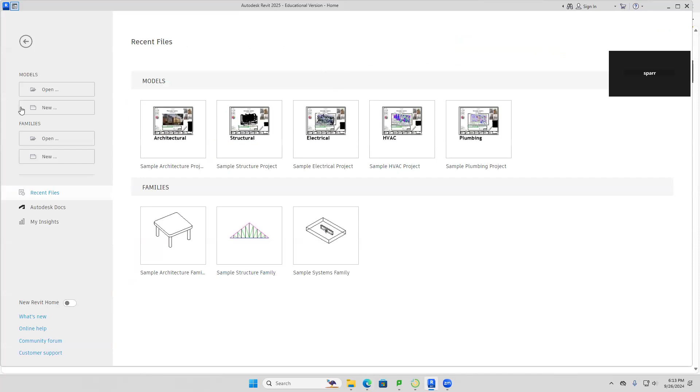Okay, so we're going to start by going to Revit, and Revit's out here, and now we're going to go over to Open. We're going to start by opening, going to our downloads, those should probably be on your desktop, go to downloads. And then here you're going to see modern hotel levels right here. So go ahead and find modern hotel levels and open it up, and it's going to have to upgrade because that's an older version, but that's okay. Let's go ahead and open that up.

Okay, now this says open manage links to correct problem. Don't need to do that, just go ahead and ignore it. That's fine. And this is what this looks like.

Okay, so what we're looking at right now is, we talked before about working with the CAD plan. So the CAD plan that we have going on here, hi Silvana, and what we're doing right now is, yeah, well just get signed in and I'll walk you through the assignments. Okay, so what we have right here is a CAD plan. We talked before about having a CAD plan and tracing over it. That's what we have right here.

Now let me show you something else that's interesting. What we're going to do right now is take a look at a plan view. A plan view is a floor plan, meaning you're looking down, and as you look down on this, this is how it will be built if you actually slice the building and look down on it. That's what a floor plan is. But there's other types of views.

So we're going to go ahead and take a look at the elevations. Over here there are some elevations. We're going to go here and choose south, the south elevation. When you do that, it's going to open up and look like this. You're going to see 2 horizontal lines, level 1 and level 2. You guys see that?

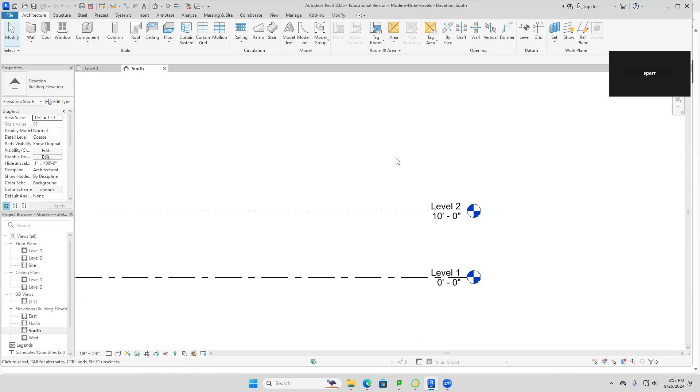I was going through last night on your... Well, good luck with that, because I've been really playing jazz with this class. I've been all over the place. I've been really improvising a bit because inspiration hits me.

Okay, well what you want to do is go to Brightspace out here, okay? When you go to Brightspace, Silvana, you want to go here. Now are you on Brightspace right now? Yeah, it's right there. Okay, then go here to Revit intro assignments, okay? Now what we're gonna do is you see you've got this modern hotel levels right here, we're gonna download that. You're gonna do the same thing, download floors and ceilings and footprint. But for right now just do levels, okay?

Okay, now when you've got that, it's gonna show up here on the right, double click on it to open it up, and Revit will open too, okay? So you don't want us to open it the other way, like how you normally open it? Nope, you can just double click on this one because it's not a template, it's a project. And when you double click on it, it's gonna tell you it's upgrading, right? Let me know when it's up and running.

It's not gonna look like this yet, so I gotta tell you where to look here. So what you're gonna probably see is this right here. Does it look like this right now? So it said don't upgrade it? You want to upgrade it. You can't open it if you don't upgrade it.

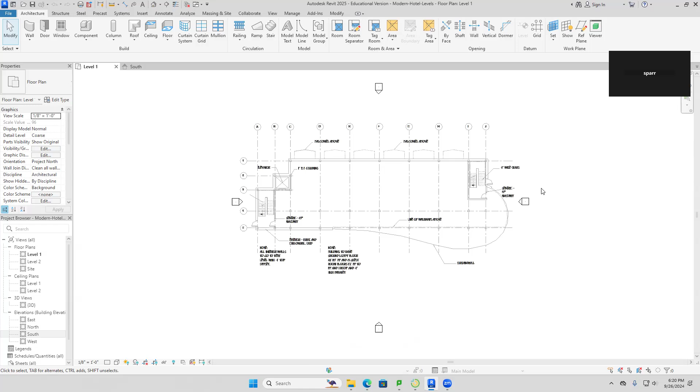Okay, now what we're gonna do here is we're just gonna add a couple levels above, and we're gonna add one underneath, just to see how this works. In the south elevation, whenever you put in elevations, you have to put in levels in an elevation. The reason why is because if you're looking down, there's no way to put in a graphical representation of a floor. You have to do it from elevation, looking at it from the side. So now I want to stack it up.

So we're gonna make them all 10 feet apart. Over here, see this right here? It says level. So click on level. When you click on level, you're gonna notice it's trying to make another level right here. But what we want to do is something a little bit different—we want them all consistently 10 feet apart. So we're going to go over here. See where it says offset? Type in 10. And hit your numbers lock, by the way—if your numbers lock is not pressed, you can't type it into the number pad, so make sure it's there. So type in 10 and press enter, and it becomes 10 feet.

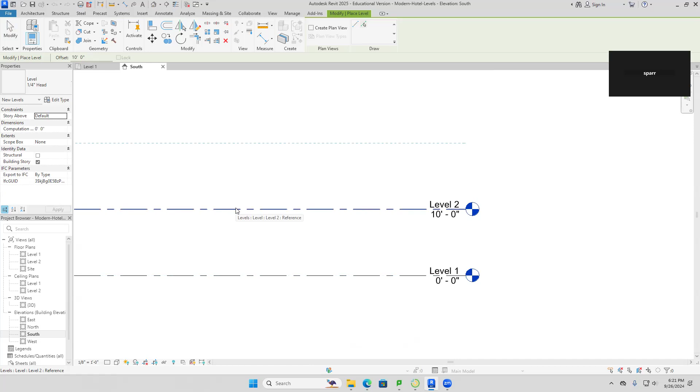Now, over here, there is another little tool here—this is pick lines. So choose pick lines, click on it. Now watch this, this is where the magic happens. You hover your cursor over this right here. Look at that—can you see a dashed blue line either above or underneath? You should see it above. If you don't, you just got to jiggle your mouse a little bit, highly technical language. But you want to see the dashed blue line above, and go ahead and click. And when you do that, you see level 3? That just created another level.

Now we're going to go over here and do another one. We're going to touch this right here, click here again. Click there, level 4. And let's go over here, we'll do one more, and we'll go here and do level 5, just like that. So we did 3 and 4 and 5, we went ahead and added those.

Now that is good. Now we can add a basement. Let's just pan down here and make one go down. So you go here, and now we want it to go down. Hover your cursor right here and click, and you're gonna get another level that goes down. Then press your escape key to finish it, press it twice to end it. And you should be seeing right here that down here, this is level 6, -10 feet.

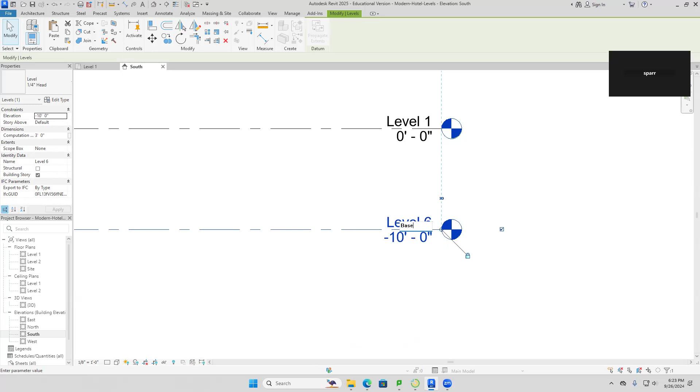Okay, we're going to rename this because level 6 is a terrible name for a level that's beneath the ground. So we're going to double click here, and change it from level 6 to basement, B-A-S-E-M-E-N-T, like that. And you should be okay, even though it's kind of dark in here—if I can do it, you should be able to do it. So there's your basement. Okay, now we have those all in place, and those are good.

And now what we're going to do is you're going to notice something here. Let me ask you a question. Take a look at this level 2 and this level 1 icon—what color are they? Blue. And what color is this?

Now what we want to do is, we created levels, but we don't have floor plans to go along with those levels. You may or may not need them. For instance, for a basement, if it's just a crawl space, you probably don't need a floor plan, but for a full basement, you do. So we're going to make a floor plan for the basement and the other levels going up.

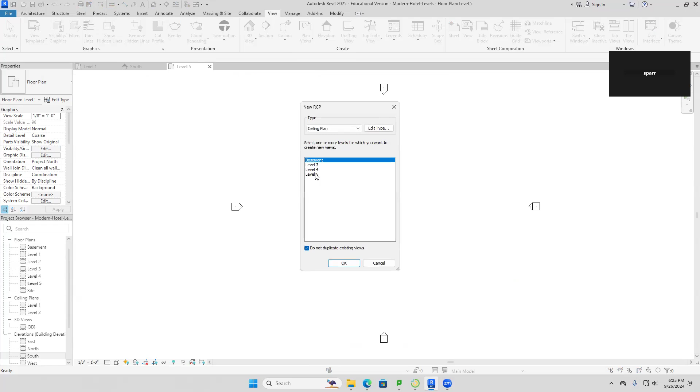We want to do the same thing with our ceiling plans. Okay, so we went ahead and did that. Now let's go back over to our Plan Views again, and now we're going to go to Reflected Ceiling Plan. Same thing, lather, rinse, and repeat - let's grab these two and click OK.

Now when you do that, we have just created floor plans and ceiling plans, and they all correspond to this right here. Now take a look at your South elevation again. What I'm doing right here, just so you're clear, is using this little red spotlight so I can make sure you're seeing where I'm going. These are our tabs - you can have several different things open at once. We went to the south elevation right here, we're looking at this, and now we're seeing this. Now look at this over here.

These are blue now. Why are they blue? Because they have a floor plan, at least one floor plan. If they have at least one floor plan, they turn from black to blue. Okay, that is how you make levels. Any questions about that at all? Okay, so that is how levels are constructed.

Now, that means at this point that as you're working with this, any levels that you would ever need to create can be created right here, and you would do it using the levels tool, which we just did. Now along with that, you can actually change these after the fact too. Let's say you need something different - let's say between level 1 and level 2, you actually have a big mezzanine area, so that has to be raised up a little bit. Well, we could do that, but we're not going to do it right now because it would get messy. If we raise this up and leave this one right there, we don't want to do that, so we're just going to leave it as it is right now. But you could do it.

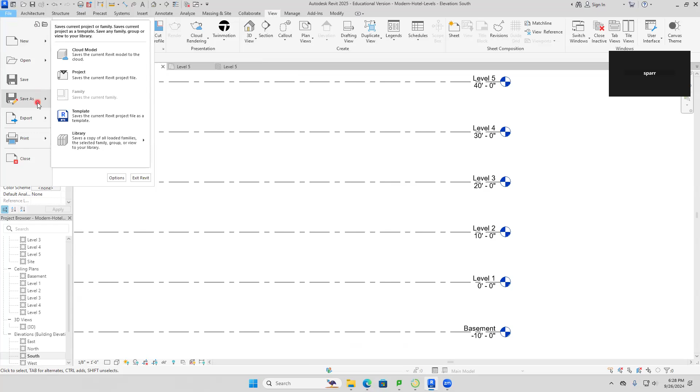What's not to like? So you're going to go here and click save. Is that letting me save it? Okay, just save it as that. So we're going to go to File, Save As, project, and we're going to name it. It's going to be capitals, and we're going to call it hotel levels with your last name. Okay, so you got that, go ahead and do that. Save it to your desktop or wherever you may want to do it, save it.

And then what you're going to do is you can go ahead and turn that in right now. So here you see hotel levels right here. What you're going to do is click on this assignment here, should be able to do that, and you're going to go ahead and upload it right now. So let's do that while we're thinking about it. Go ahead and do that, and upload it. Give me the thumbs up when you guys have that done.

All set, Michaela? Got that? Okay, easy. Okay, all right, Sarai, got that? All right, Silvana, doing okay?

All right, now what we're going to do, now that we've done that, we are going to continue on our Revit excursion here. We're going to close out of this one. So we're going to go to File, and we're going to go to Close.

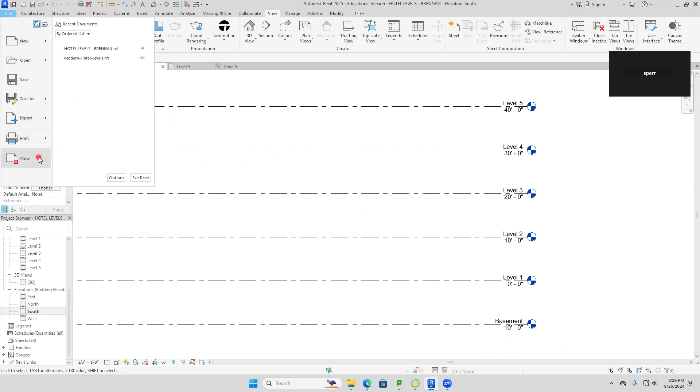And now what we're going to do, we're going to open the next one. Now the next one on the list was, let's see here, it was floors. We're going to go to floors. So go here and open up floors. And that's also going to have to upgrade. That's normal.

Sure, I'm sorry? Yeah, close, yeah. And I got an error here. Don't know why, but not going to worry about it. Okay, so we're going to continue on here.

All right, and just go ahead and dismiss the errors when they come up. Can you guys all see something that looks like this? Mm-hmm, you guys will see that. Okay, now what we're seeing right here, this is the first floor, and here's furniture and so forth, which we could put in. But for right now, what we're going to do is this.

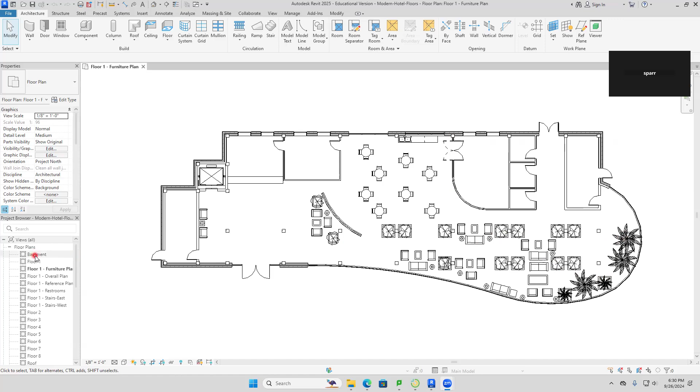We're going to go over here, and we're going to take a look at the basement. So go down here to the basement. Basement looks like this. Now, what we have going on here, this is actually the ground floor. This is the basement that we have right here.

What we're going to do right now is we're going to hide some of this information around the perimeter because it's kind of obnoxious. So what we're going to do here is a couple things. Go ahead, this is an elevation marker, click on that elevation marker and then just type in VH and that'll hide it. Then click on one of these section markers, click right in the center, type in VH, and VH stands for visibility hide. And we'll do the same thing for the grids. VH hides it. And when you're done with that, you now have something that looks very clean.

Okay, so now at this point, this is a very clean floor plan.

Now, there is no floor in here yet. Let me show you something you want to do though. Go down here and take a look at this right here.

Do you see this? This looks like it says select elements by face. Can you guys see that at the very bottom? It's got a blue, it's a blue sheet of paper with an arrow with an X. Do you guys see that? It's called select elements by face. Well, you want to click on that so you can select the elements by face.

You want that. Okay, now, there is no floor here. I'm going to prove it to you. What I'm going to do is let's prove it to ourselves. Let's go ahead here and we are going to take a look at this.

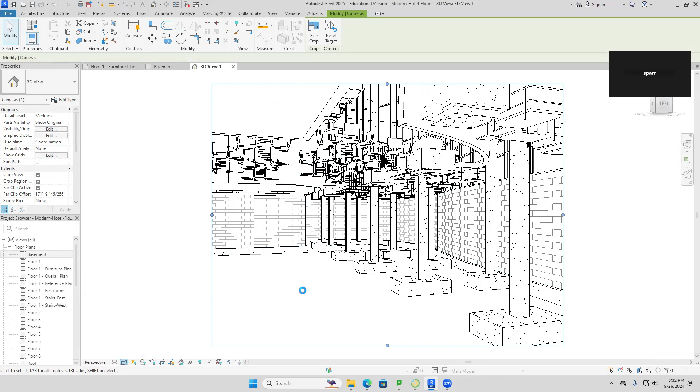You're basically not seeing a ceiling either. But down here, there is no floor. If I go ahead and make this realistic, there is no floor. That's basically just, these are sitting pretty much in the middle of nowhere. All right, so there's no floor.

So we want to put a floor in here. The floor is going to be going in above all these footings and so forth. So we're going to do that.

Okay, how you guys doing? Good. All right. Okay, Audrey, doing okay there? Yep. All right. So, okay, so back over to here. We don't have a floor just yet. Okay, all set there, guys? You need to have something? Almost. All right. There. Okay.

All right, so now to put in a floor. Now, fortunately, floors are really easy to make. Okay, we've already done a floor before. Now this one's a little more complicated because what we used before was we actually used just a rectangle command, which works if you have a rectangle. This is not a rectangle.

So what do? We give up and call somebody else. No, or you give Professor Tom a call. How about you take a call? I actually do that. I actually have all these students I teach. I've taught thousands of people the last few years. And so what I'll do is I say, look, I give my email, and I'll get these calls. I'll get these emails later. And he's like, hey, they'll ask questions and stuff.

It's pretty fun. All right, now what we want to do here is, here's what we want to do. We want to make the floor go inside here. Okay, the floor, notice, watch what I'm going to do right here. The devil is in the details, as they say. What you want to do is you don't want to go to the outside. You want to go to the inside, right?

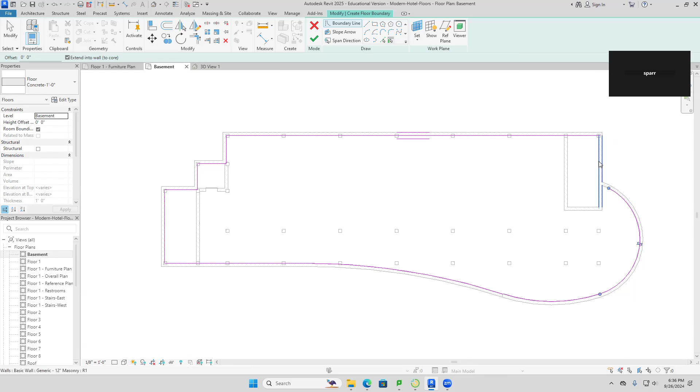Now, this is already done for me. All I got to do is click on it. I go ahead and do that. And then I want to grab this one right here as well. So I've got all that. Then I'm going to go right here and I'm going to click right here.

Now, once I've done that, that is actually complete, except there's a little bit of a problem here. The problem is this little tail that's sticking out. There's a little tail here. This is a problem. Here's the little tail, see this right here? All right, that cannot be allowed to stay. So what we're going to do here, we're going to use this tool right here.

This is called Trim Extend to Corner. Now, please look at this. When you hover your cursor over it, it's going to say Trim Extend to Corner. And what you're gonna wanna do with it is this: we're gonna go up here and use this, click on it. Now watch how I use this.

You're gonna go over here and you keep what you want. You basically click on what you want to keep. So you click here and then you click here. And when you do that, the tail disappears. Can you guys see that?

Yeah. Now, once you've done that, any boundary that you ever make in Revit, you always have two choices. And the choices would be these: accept it or abort mission, okay? Do you want to discard the changes or do you want to accept it? In this case right now, we're going to hit the green check mark and see how we did.

So hit the green check mark, and when you hit the green check mark, it's going to say this, if you did it right. It says, would you like to join geometry and cut the overlapping volume out of the walls? Hit yes, and it should turn blue like this. That work? If that didn't work, let me know.

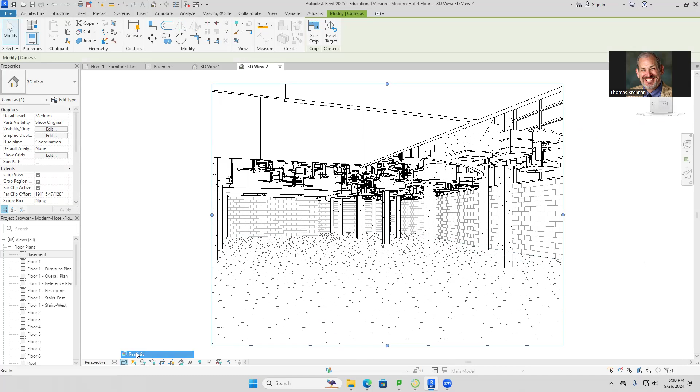We're going to go here, and we're going to go to camera. So go to camera, and you're going to put the camera right here, and we're going to look all the way down in this direction here. So just pull your view target down to the end of the building, and now, hey, Shazam, look at that. You now have a floor. So there is a floor. All right, that makes sense?

That work okay, Silvana? It's just this piece right here is gone. What was that now? This piece right here, I'm trying to figure out how to get it back. Okay.

So I clicked here, like you said, this one, then I clicked here. Yeah, that's the wrong one. You did the wrong one. So you want to choose this corner, click on this end here, and this end. Oh, there you go.

And then hit the green check mark, hit yes, and then zoom out. What you want to do is click on the arrow to the right of the house, choose camera, and set a camera right there, and look, your target's down here. Click right there. Then go down to visual style, and you get this stuff.

Yeah. How's it going here, guys? Here's the floor, that's fine. What's that? I was just saying that. Yeah, I know, I know. Well, the reason is there's no floors yet, so we're helping to make things work out better.

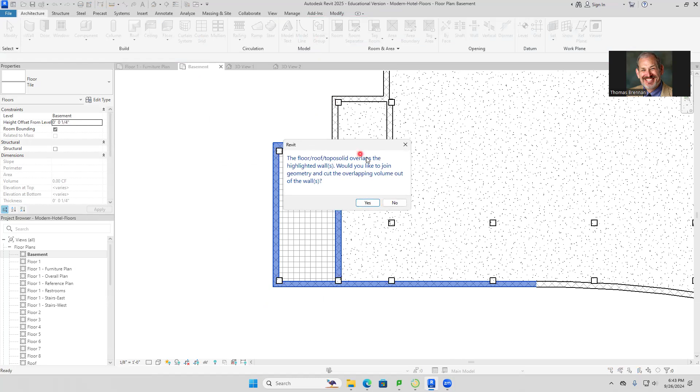To fix it, we go here and use this—this is our Trim/Extend to Corner. The Trim/Extend to Corner lets me pick what I want to keep, and it closes it just like that. Now once you've done that, hit the green check mark, and it's going to say the floor topo solid overlaps. Go ahead and say yes again. Now look at that—you now have a tile floor.

The tile floor is sitting on top of the one-foot concrete floor. You guys got that? Does that make sense? Mike, that work okay? Yeah. Ben, that work okay? Yep. All right, Audrey, okay? All right, now let's take a look at this—let's go over here and take a look from another camera.

So go to camera and we're going to click right here, and look out through the end here. Now look at that. You've got a tiled stairwell right here. I'm just going to open this up a little bit, and that's what you're looking at right now. It's rough, but it's got that right there.

So we have this going on here, and then if you make it realistic, you'll get a very good idea as far as like what that looks like. With realistic, looks like my tile went away, but that's okay. Let me try texture, see if that looks a little better.

Yeah, texture isn't any better. So what I'll do is make consistent colors, and you'll see your tile there. Okay, so that is how you could put a floor on top of a floor, and it works just fine. You guys all see that?

Okay, now we're going to repeat that. Let's go back to the basement floor plan, and now we're going to repeat it over here on this side. Lather, rinse, and repeat. We're going to go over here, now over to this side, pan over to here, and do the exact same thing.

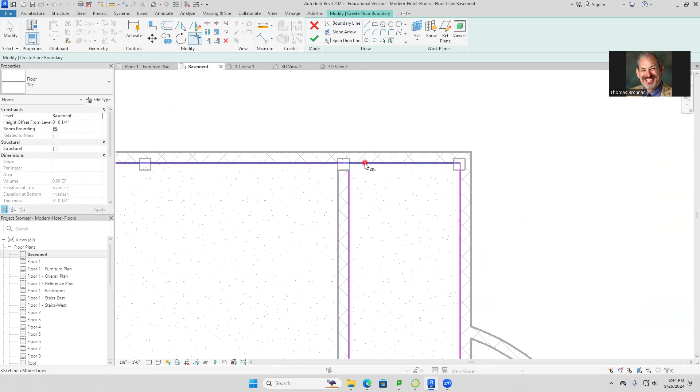The floor is already set up, so go to floor, we're going to do the exact same thing. Everything's the way it should be. We'll go ahead and do the same thing here, and then we'll have to use our Trim/Extend to Corner to fix the corners, or corner in this case. So go from here to here and hit the green check mark, and I'll say yes again. And now I have this here.

I now have the tile on top of the floor. So easily done, very easily accomplished. So now we have a tile floor on top of our concrete floor in our stairwells. Make sense? All right, easy peasy. Okay, so we got that now. Okay, now we're going to save this, and let me make sure I got this one right.

This one's going to be called, save this as hotel floors dash your last name. So go to file, save as.

So that's how that works. Just reviewing this stuff. Okay, so we can close out of there now. Go to file and go to close, and that will go ahead and close out of there. So we went ahead and did a couple of items right there. We did levels, we did floors. Now we're going to do ceilings.

Now ceilings are very similar to what we just did with floors. We're going to go to open again, go to modern hotel ceilings, and open that up. Okay, just click OK if it gives you an error, and click close. We'll close this one, we'll go ahead and ignore, and close out of this too. All these problems, but for our purposes, they're fine.

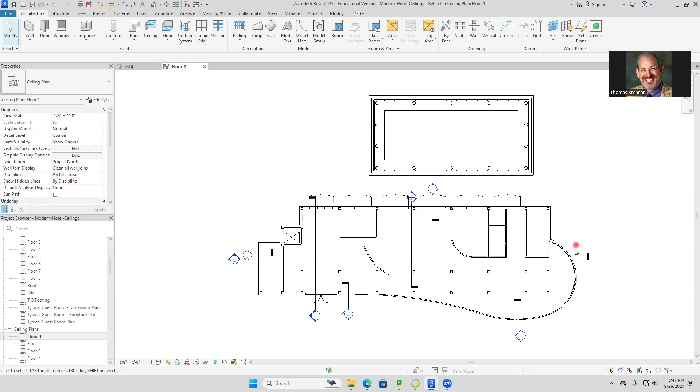Okay, now what we're going to do is hide the grid. So click on the grid, and type in VH, visibility height. And then you're going to click on these section markers. I'm going to hide those two. Okay, then we're going to zoom in to these rooms right here.

Now, these rooms right here, this is actually a kitchen area right here. This is a restroom, this is a restroom, and this is a janitor's closet right here. So what we're going to do here is put in ceilings here. Now, the cool thing about ceilings is they have an intelligence that allows them to look at the walls and automatically place a ceiling. This is kind of cool here. Watch this.

So we're going to go over here, and here's ceiling. So click on ceiling. And when you click on ceiling, you're going to see that right here. Can you see it says compound ceiling 2 foot by 4 foot ACT system? That stands for acoustical ceiling tile.

Now, what does that mean? Take a look up at these right here. These are 2 foot by 2 foot acoustical ceiling tiles. They're squares. 4 foot by 2 foot are very common in older buildings. 2 foot by 2 foot are a bit more common now.

Now notice this right here. Along with this you have these right here. These are called lighting troffers. That's a fluorescent lighting troffer. That's a 4 foot by 2 foot section right here.

Here you have a supply right here. That's a supply, that's a return. Supply means it's actually blowing air into the room. The return means it's sucking air out. So you got a return there. You guys all know this? Okay, and then you got this 2 foot by 4 foot troffers.

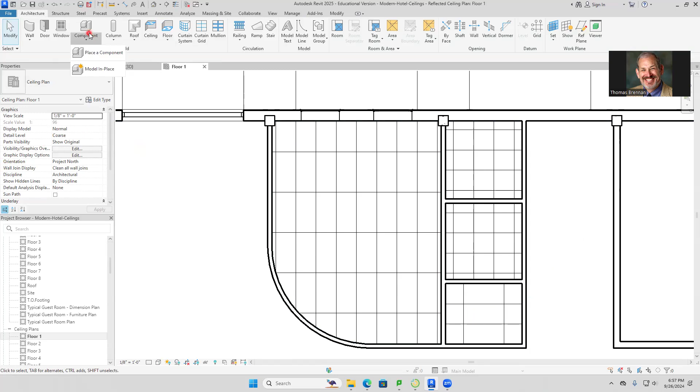Then we're going to start to put lighting fixtures in here, which is pretty fun. So now to put in lighting fixtures, we're gonna do this now. You guys are with me so far? Okay, we're gonna go over here to component. Click on component, and we're gonna go here to place a component.

Now you're gonna notice you got a floor lamp here, which we don't want. We're gonna click here, and go down here, and hopefully they're here. Hopefully they're in here, let's see here. Oh, come on, really? They're not. Let's see here, I thought I had them.

Insert, Autodesk Family. Alright. Yeah, no, okay, so that's a bit much, we're not gonna do that, so that's okay. Let's see if there's another way to do this, we'll go here and load family here. Nope, that's not been loaded either, okay, so we'll have to deal with that later. That's all the content we have here, so that's all we're gonna do, so that's how you do ceilings.

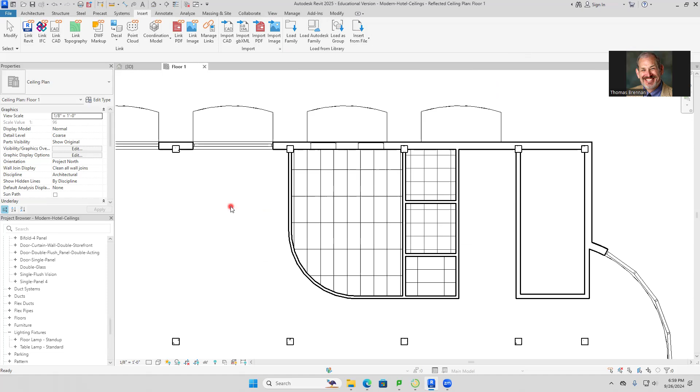And there's more to it than that, but for right now, that's all the content that I have here. I don't think I can pull any from any other situations here, so there is a way to do it, but let's leave it alone for right now. Okay, that's good, we'll do the other later. So I have some other content, and I'll get that going in a minute here. Okay, so that is how you put in ceilings. Ceilings are pretty easy to do.

Okay, so now we're going to submit this one. This one is out here, and we're going to go to Brightspace, which is actually over here. Come on now. Okay, so in Brightspace right here, this one is going to be called hotel ceilings dash last name. So we're going to say this was hotel ceilings with your last name, let's do that, and we're going to submit that. File, save as, project, hotel ceilings with your last name.

Like that, alright, and then we're going to close this. Let's go to file and go to close. Alright, moving on from there, we're then going to do the next thing here. So we went ahead, we did levels, we did floors, we did ceilings. Now there's roof, now this is just going to be a flat roof. We're going to put a flat roof on the top of this hotel, and then we're going to do a little bit of work with stairs. Then we're going to get into tonight's project.

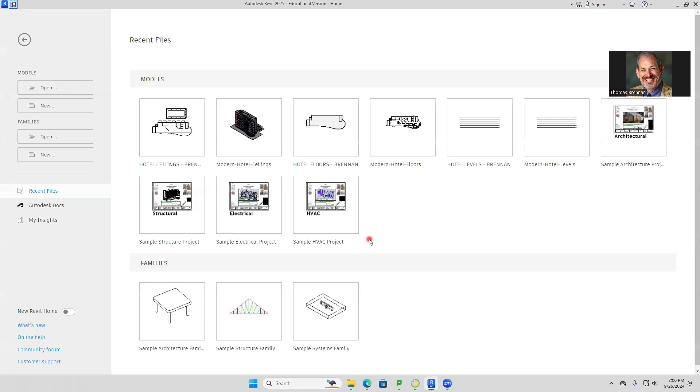So putting a roof on is really quite simple. So what we're going to do is open that one up. The next one is called Modern Hotel. You guessed it, roof, but we're going to do the footprint. There's extruded, there's footprint, we're going to use footprint. So let's go ahead and do that.

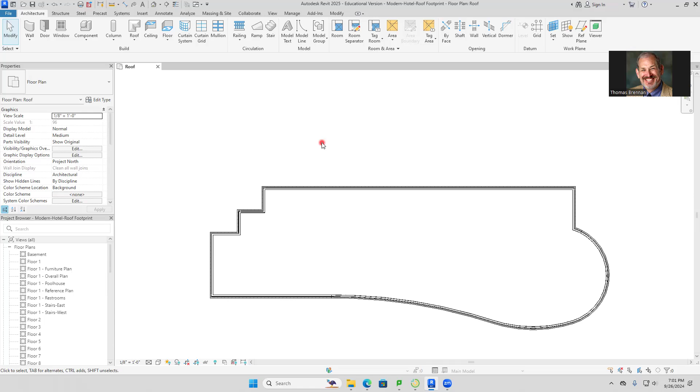Now I'm going to show you something kind of cool here, this is going to be kind of fun. Go over here, and you're going to go to this, which says default 3D view, right up here. Click on the default 3D view, and you're seeing this now.

So now what we're going to do is tile our windows so we can watch the roof as it goes in. To tile the windows, type WT, and it splits your screen. Once you've typed WT and split your screen, then type ZA, which stands for zoom all. Should look like this now. You guys see that okay?

Now, over here, roof is not your current window, so you want to click here, and now it is your current view. When you click here, it'll be bold. This will not be bold.

Now we're going to put a roof here, and the roof works just like the floor. So go over here to roof, and go to roof by footprint. Now in roof by footprint, you've got this basic roof, generic 12 inches, that's fine. And we're going to use this right here, which is your pick walls, that's also fine.

So now watch this, we pick the inside, just there, and there's your line right there. I'm just going to zoom. Oh, you know what I did though? I've got a slope going, no good. So I'm going to undo that, and to undo it I just go ahead and use undo.

And then I'm going to go ahead and do that again. I'm going to go to floor - I'm sorry, not floor, excuse me, I mean ceiling, okay, I mean roof, roof by footprint, sorry - so we're going to roof by footprint. And I need to uncheck define slope. You see this right here? Uncheck define slope, we want to make a flat roof.

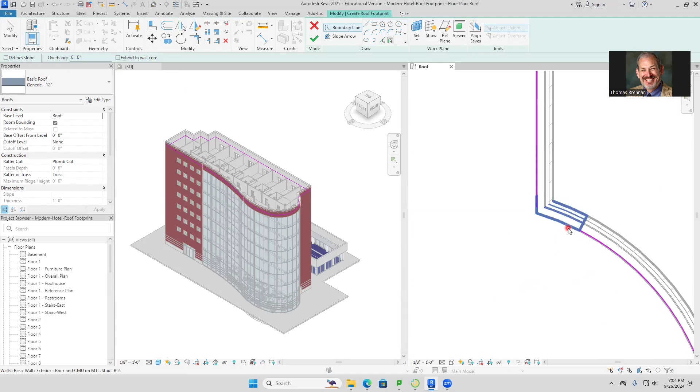So we do that. Now, once we have that, we can then go ahead and pick this inside wall and go all the way around the perimeter, picking the inside, because this is a parapet. A parapet is essentially the surrounding wall that keeps people from falling off, and roofs typically have them. As I zoom in here, let's see if these are all connected. Hopefully they are, they should be, yeah, okay. Then you want to go ahead and do that, and here I'm going to pick this last one right there, and then at that point I think we're good to go.

Just zoom in as you need to. And then once you've got those all put together, if you have any overshoots, go ahead and trim and extend it to corner right here. But if you think you've got it, hit the green check mark. When you hit the green check mark, you'll see the roof actually populates on both sides. Pretty cool, huh? That work okay?

All right, so that right there is your roof. And the roof actually went in right here, so we've got that going on here. All right, any questions about that at all?

Okay, now that's a flat roof. We talked before about how to do gabled roofs, okay? For right now, the big secret about using a flat roof is when you're into it, you just want to make sure that you uncheck - if I click on any wall right here, you do not want it to be sloped. That's the biggest thing right there, that's the biggest thing you have to account for.

Okay, this one is ready for the books too. So now we're going to go here. This one is going to be called Hotel Roof with your last name. So when I did it, it went at the curve instead of...

So you got... I think the last one. Yeah, you see, we talked about the define slope, that's what you don't want. So let's just hit the X because we don't want that. And yeah, now let's go back into it. Go to roof and roof by footprint. Okay, which you're in, you're in there. Just, and then you want to uncheck. No, I really didn't. Okay, and then you want to, okay, then pick your walls. Yep, and it should go pretty easily.

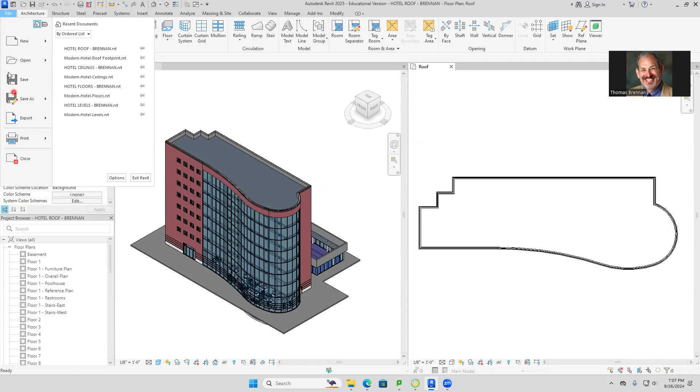All right, now the final one. Last, what we're going to do is I actually have another one out here for stairs practice. Now we're going to be doing a little different thing here. We're actually going to see how to make stairs. This is an interesting thing here. We won't be doing too much with stairs, but I want you to see how to make them.

So we're going to go here and go to open. And when you go to open, I've got stair practice 3-story. Can you guys see that? That's another one that's actually out on Brightspace. So download that and open up stair practice 3-story and open.

You guys will see this? All right, you got that, Audrey? Yeah. All right, Michaela? Yep. All set? Good. Okay, now what we're looking at right here is there's 3 floors here.

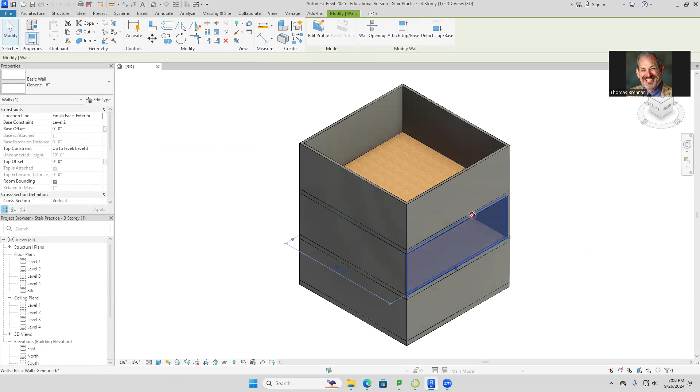There's this one down here, this is 1, this is 2, and this is 3. So there's 3 different floors, okay? And they're surrounded by walls. So that's what we have going on here. So we have those 3.

Now, that being the case, what we want to do here is put some stairs starting on the bottom and going all the way up. Now how do we do that? Well, first thing we're going to do is see what's going on here. I'm going to show you a very cool trick here.

And in this 3D view, if you go over here and grab the slider bar here and go down a little bit, you'll notice there's something here called section box. Right here is called section box. Put a check mark in it and hit apply, and your building will now be surrounded by a glass box, so to speak.

See that? Now this is where it gets interesting. Click on the section box and you'll see this little double-sided arrow. Do you guys see that? Click on the arrow and push it back in this direction and you'll see cross-section, a live cross-section. Now this is cool stuff, okay? Particularly if you're into building stuff at all, it shows you exactly what's going on.

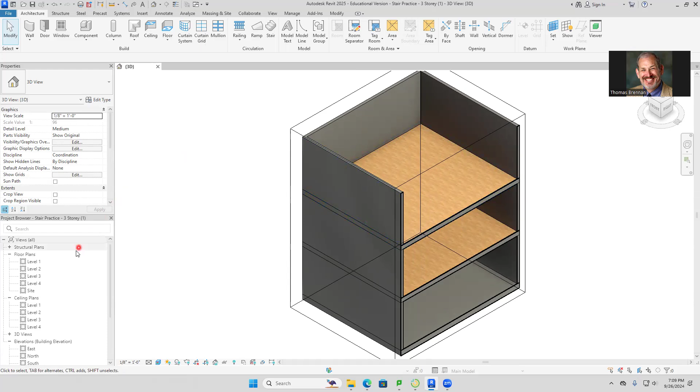Now that we're seeing that, what we're going to do next is go back over here to floor plan level 1. So go to floor plan level 1 and it looks like this. I'll zoom into it. Now this is the bottom floor. And so where it says room 1, that's what's known as a room tag.

It's just a label, we can get rid of it. So who remembers what we type? We click on something and then to make something be hidden, what do we type? VH, that's right. So click on this and type in VH, visibility hide, that's gone.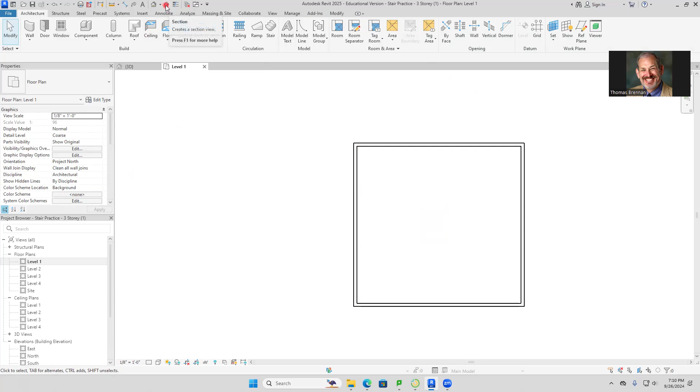Okay, now what we're gonna do now is put in a section, a real section. We've got the live section, that's just for looking at things. Now we need to make a section, and there is a difference. I'll explain a little more in detail, but here is your section marker right here. Can you guys see this? That is your universal section marker. It looks like a circle with a triangle at the end. Click there, and what we're gonna do now is make a section. We're gonna click here.

We're going to go right, pull it right down like this. Go ahead and do that. Now, once you've done that, it's going to look like this.

Now you want to flip it so it's looking to the left. So click there and it's going to flip it. Do you guys see how that flipped? This right here flips it.

And then I'm going to take this and just drag this outside like that. So now I'm seeing all that. You guys good so far?

Now, to see that view, you're going to put your cursor right on the tippy tip of this triangle, highly technical language, press escape key first, and then double click on it, and it's going to open it up. There's your section view. Now, this is a true section view.

It's not just for reviewing like the other view. This is an actual section showing you actually what's going to go in here.

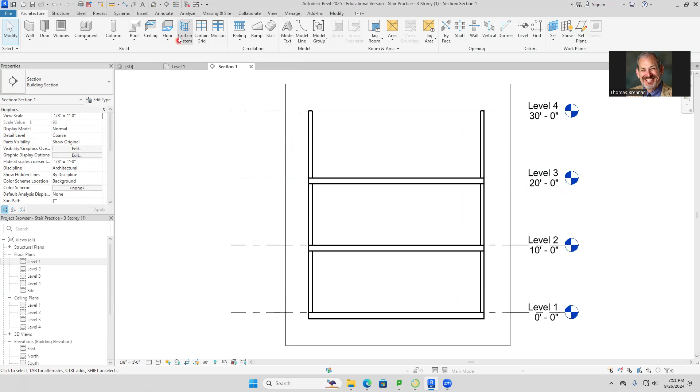Now, before we go any further, let me show you something interesting here. This is your thin lines. This will let you thicken your lines or thin the lines. If you click thin lines, the lines get thin, okay? It's just something you want to be aware of. So we just thinned the lines.

Now we've got this set up. We're ready to put in stairs now. So let's go back over to level 1. On level 1, we're going to put some stairs right here. We're going to start here and you're going to go in this direction. We're just going to make the stairs go from level 1 to level 2. So let me show you how easy it is.

Now let me explain something about stairs. When you're talking about stairs going from one level to another, there is a lot of calculation that goes on with this. These are a royal pain. Anybody who's a builder hates doing stairs because they are highly technical. Some people may love them. Those people are not counted.

But anyway, so what you want to do is go from level 1 to level 2. Here's the trick: you've got to go from here and go up there, but they can't all be different sizes. They can't all be different locations. You can't be 6 inches too low when you pull through, and you can't be 6 inches too high. So how do we do that?

Revit has a stair calculator. You don't even have to figure it out. All you have to do is know what your levels are named, level 1 and level 2. That's all you need to know.

And then what it uses is the magic formula, 7-Eleven. Who knows what the 7-Eleven is by any chance? It's where you get a big gulp. Gas station, yes. You can get hot dogs, you can get Slurpees, taquitos, pretzels, beers, all that. Okay, so all that is possible.

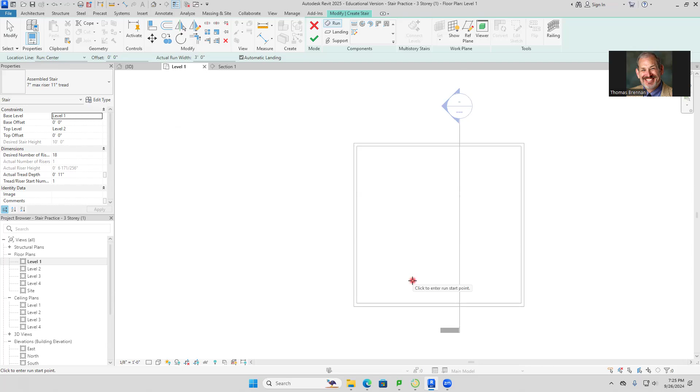Bring your cursor right down here, then bring it around here, click your mouse, and pull it up. Now look at this, look what it's doing right here. As you begin to pull it, can you see that light gray text on the bottom? It's telling you how many risers you're creating. 5, 7, mine says right now 7 risers created, 11 remaining. Just keep on going up, and when you get past that line, go all the way past the line.

And when you go past the top of the stairs, it stops creating risers. Why does it do that? Ding, ding, ding, because it knows it can't go any further, because the calculator is doing the heavy lifting for you. You never think about that. And it says it at the bottom: 18 risers created, 0 remaining. So you go ahead and do that, and what that's doing is going from level 1 to level 2, it's doing the figuring out.

Now the next thing you see right here is over here, look at your riser, look at your riser height. 6 and 171, 256. How's that for a nice, really even number, okay? But that's actually what it is, which is, who needs 256 inches? I don't think that's necessary, but anyway, that's what it is. So once you've got that, go ahead and click your mouse and then click the green check mark. When you click the green check mark, it creates your stairs.

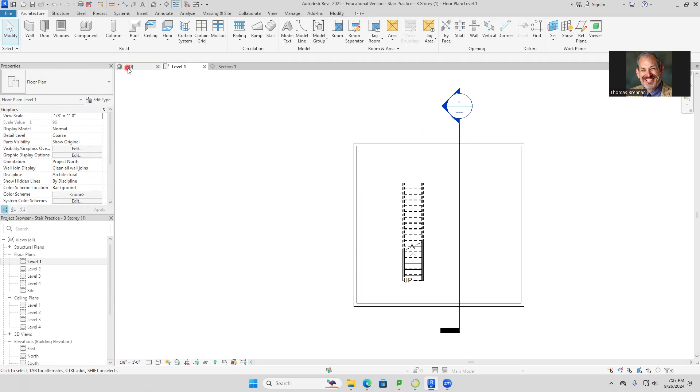Now let's take a look at the 3D view here. Look at the 3D view, and we're going to rotate a little bit just to see what's going on here. Just rotate it, and you'll see, hey, there's some stairs. You see them? Now look at section 1. Take a look at section 1. Look at that.

And if you want to give yourself a little bit more of a little realism here, you can go ahead and put on, let's say, consistent colors. Looks like that, or actually, hidden line looks pretty good. So you got that. Now here's something I want to show you.

Go back to your 3D view. What's wrong with this picture? Huh? Oh, there's no cutout. Yeah, no cutout. So what's happening right here is great stairs, but pretty ineffective at actually what they're supposed to be doing. So what we need to do is put a hole in the floor here. Rather than put a hole in just one floor, we need stairs that go all the way to the 3rd floor too. So when we do that, we are going to create a shaft, and the shaft is going to go from the 2nd floor up to the 3rd floor, okay?

So let me show you how to do this. To do this, we're going to go back to the section 1 view. We have to do this next thing, looking at a side view. This is your elevations. Let's go here. Now going here, what we're going to do right now, you guys all here now?

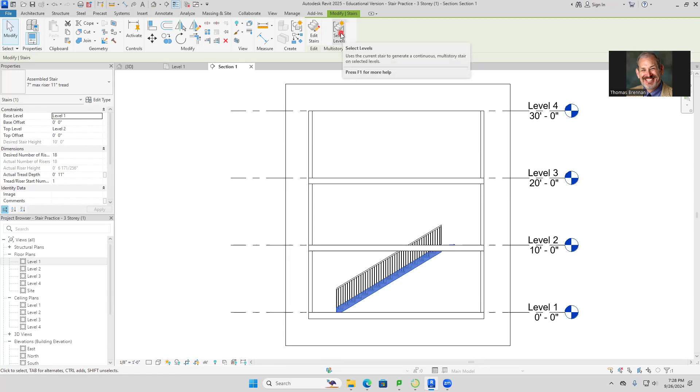Click on the stairs, click right on the blue part of the stairs. Just go ahead and do that. Now, when you click on the stairs, one of the great things about Revit is it's always Johnny on the spot about understanding what you're doing and offering you options. So we click it here, and then you have right there, see where it says select levels? Can you guys see that? Okay, can you see it or not?

Yes. Okay, click on select levels, and then what we're going to do now is we want to click on the line for level 3. Click on the line for level 3, and then click your green check mark, and boom, there they are. See that? So it automatically gives you multi-story.

Now, this is actually how it is. When you think about it, think about your house. Are your stairs stacked right over each other? Most are, most are all stacked that way. There are exceptions, but in most homes that are being built today, you have your stairs and they're stacked right over each other. So you have that.

Okay, click right on the stairs, and go to select level. Click on a line for level 3, and then click the green check mark. Yeah, there it is.

Okay, now next we're going to do one more thing. We're going to put in a shaft. To put the shaft in isn't difficult. Let's go to level 2 here, zoom into level 2. Now level 2 looks like this, and we're going to hide the tag.

Click on the tag and type in VH. That'll hide the tag, and now you can see the basic outline of the stairs. We want to make a shaft to let the stairs pass through. So this is what we're going to do.

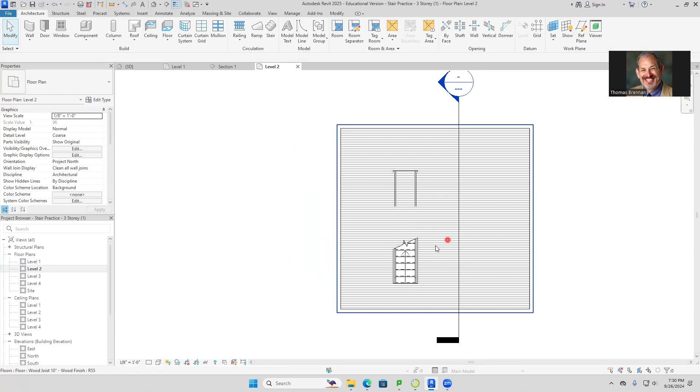First of all, just to show you what this looks like, I'm going to switch to realistic view. That's what the floor looks like — kind of neat, got a nice wood grain floor. I just went to visual styles and made it realistic.

Now here's where we put in a shaft, right here. Can you guys see this? Go up here to shaft. When you click on shaft, we're going to go over here and create a rectangle. Shaft, then rectangle — here's the rectangle tool, can you see that?

So we're going to go there, and now pick a point here. I'm going to make the rectangle roughly this size — I can fix it later. Let's just make it roughly this size right here, leaving three risers at the bottom like that. So you do that, and then click your green check mark.

And it goes ahead and creates that. Now I'm going to click on the shaft right here. The shaft is going from level 2, and then it's unconnected, so it may be going a little too high. Let's click on that shaft here.

Click on the shaft, it'll turn blue like mine, and then we're going to do this. Notice that it's level 2, and the base offset is -1 feet. That means the shaft goes beneath the floor 1 foot, because you've got the surface of the floor, which is level 2, and then it does the rest.

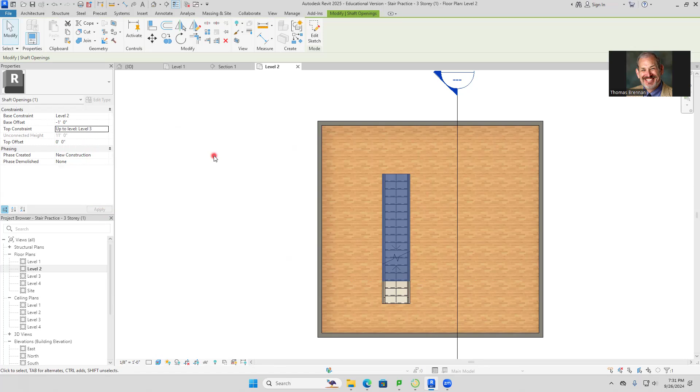Now we're going to go here to where it says unconnected, and change that from unconnected up to level 3, then click apply, and we'll take a look at it. Let's take a look at the 3D view — now you see there's a hole that allows the stairs to go through. You guys see that? Yep.

All right, that's how you would make stairs. That's how you make shafts. That's how those all go together. Does that make sense?

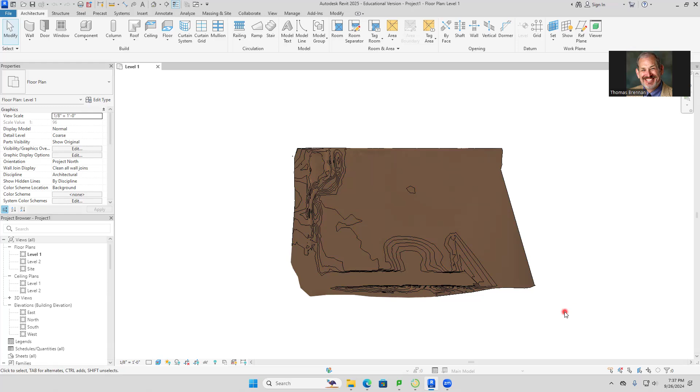You've got this right here, and that's just topography, like we've been talking about, and like you guys have been talking about in your construction technology and civil technology courses. So you got this right here. And just to show you what this looks like, if I go ahead and take this—is that going to flip it?

No, it's not. So I'm going to go to my 3D view. When I go to my 3D view, you can take a look at this. You can kind of see where it's got some ridges and so forth.

So we're just going to put the warehouse out here, and we're not going to worry too much about the rest of it. We're going to go to level 1.

Now going to level 1, you guys will have this. You've all seen it? Okay, now here's the parameters. You're going to model the rectangular warehouse with the following parameters: use your wall command, generic 8 inches, unconnected 20-foot height—I think that's going to be the default—and it's going to be 150 feet by 100 feet.

So let's go ahead and get started doing that. We'll go to wall, and all this is set up exactly the way I want it to. I'm just going to make a rectangle, and we're going to start placing it right here like this. And then we will use our temporary dimensions to give it the proper size.

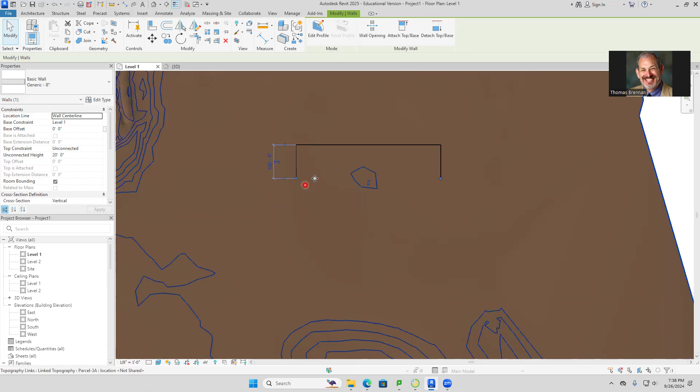Okay, when you take a look at it in 3D, it should look like this. It should sit right there. So make sure you check it in 3D, make sure it comes in like this. So it should look like that. And then from there, you're just going to add the other elements as you need to.

Now, if you don't want to see the topographical information, you know what to do. You click right on it and type in VH, and that'll hide it. And then you just go ahead and do this.

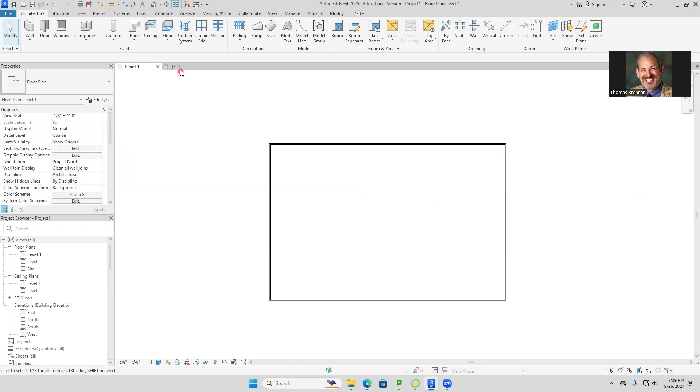And you want to make your floor go to the outside on this one. So we're going to make the floor go to the outside.

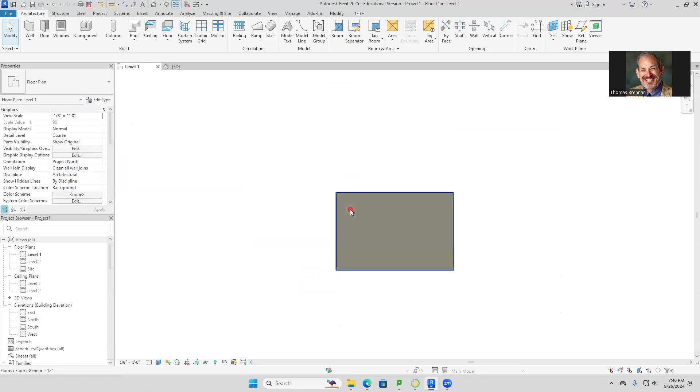Quick question—remember how you said we couldn't find the ceiling fixtures? Are you going to add those or? Those are in here, this one. They're in this one. Okay.

Yep, and so if you actually go here to component, you got—by the way, you got a lab table here, that's your table. You've also got countertops, dispenser. Let's see what else we got in here. Yeah, you've got toilet stalls, trash receptacle, urinal.

Also, I could have sworn I had a coffee grinder, I have a bunch of coffee grinders—let me see. Okay. Yeah, I definitely had some coffee grinders and things. I don't see them. Maybe they're down here. I don't know, should I look under equipment here?

It's saying that the floor overlaps. That's true, or—

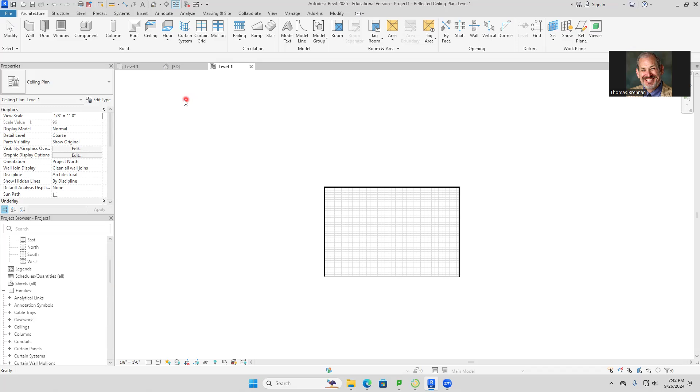Shouldn't say that, because you said do the floor on the outside first. Yeah, one second here.

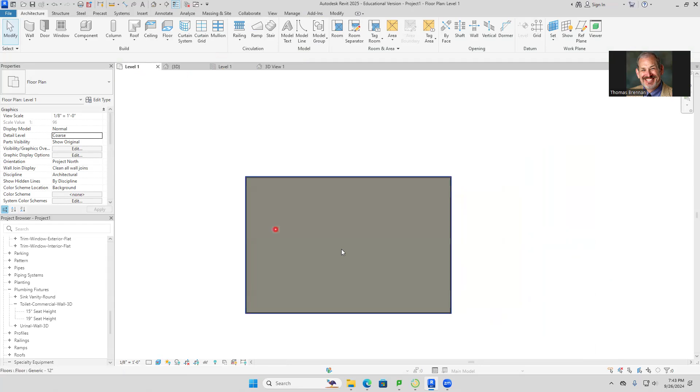Okay, now I could have sworn—yeah, then after that you want to put in bathrooms, and then you also want to put in 4 offices. So your choice of walls.

Does it matter like how they look, or do you want to walk on one side, or does it not matter? I'm going to let you decide how they work. I'm basically just going to let you kind of—the goal of this right here is to let you design it yourself. So that's what I'm going to let you do.

Do we do the roof on the level 1 floor plan? Or should that be level 2? The roof will have to be on level 2. Okay, yeah.

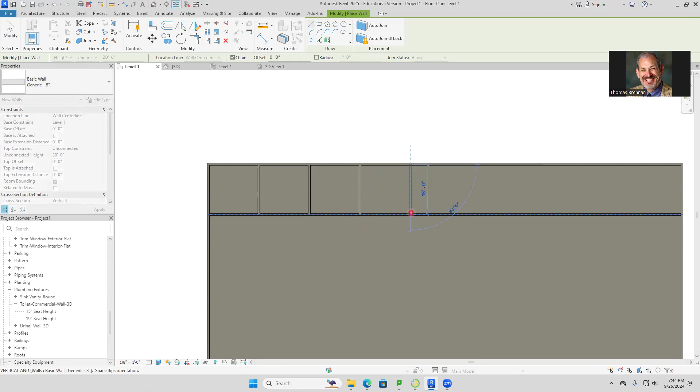I'm putting in more, I'm gonna put a whole string of offices down here. I said you only had to put in 4, but you can put in more than that, that was just meant as a minimum. So do this, and then I'm gonna put in my restrooms over here. And you guys know how to put in doors, and also don't forget to put in windows.

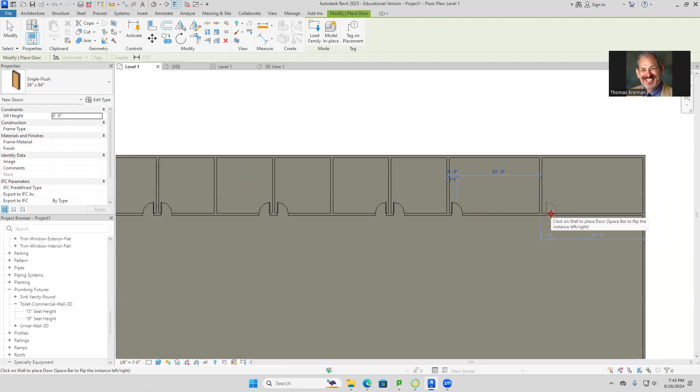Now, when you go to component right here, you can actually go here, and this is where you get the bathroom fixtures. You've got actual bathroom fixtures out here, such as a toilet stall with toilet right here, and you got these, so you can just go ahead and use these. They want to find a wall, so you just want to go and find those.

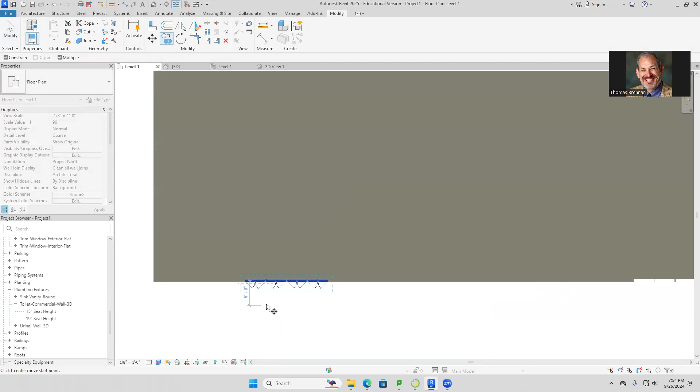The lights are under Revit links, right? I'm sorry, what, the ceiling lights? Actually what you would do is look at level one right now. Let's see, okay, we got this. Here, okay, well I'm not seeing them right here. Let me try level two real quickly. Yeah, I should be able to see. I can't, this one doesn't change this.

Let me just do some real quickly here. I gotta make this 16.

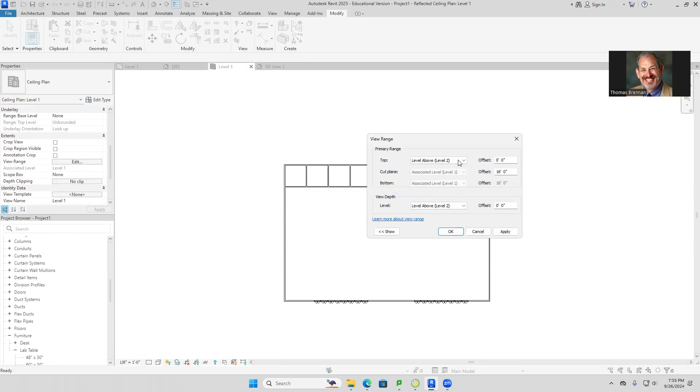Okay, what you want to do is, all of those, if you go to place a component, these, if I did this right, I think I did, they should be here. Maybe I didn't put these in here. And you can't download this, I mean I could probably download them too, but let me look here. Maybe they're under lighting, let me look here.

So I guess you guys are off the hook for the lighting because I don't have that in here. Okay, so don't worry about that. I definitely... I didn't say a thing.

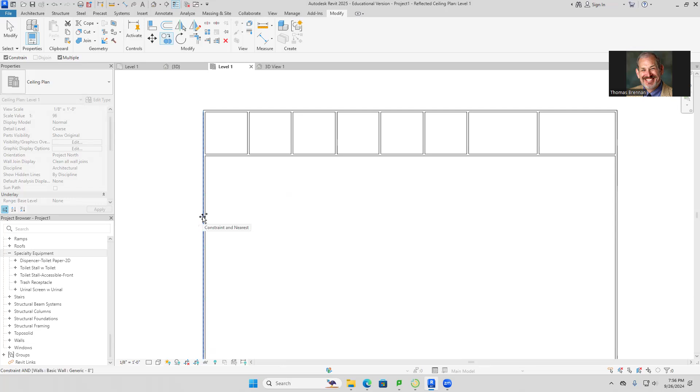Made the all artificial light inside, that way you can't tell if it's daytime or nighttime. My fiance bought those blackout curtains, ruined my life. Oh man, I tell you what. I just keep sleeping, I'm like, yeah I know. I took them off, I was like, can't do it. Yeah, we got spoiled with those. I spent a couple nights in a hotel, it's like oh my gosh this is wonderful. Ours are pretty close, they do black out pretty well, but you gotta be careful, so if you want to wake up just leave them open a crack, you know what I mean?

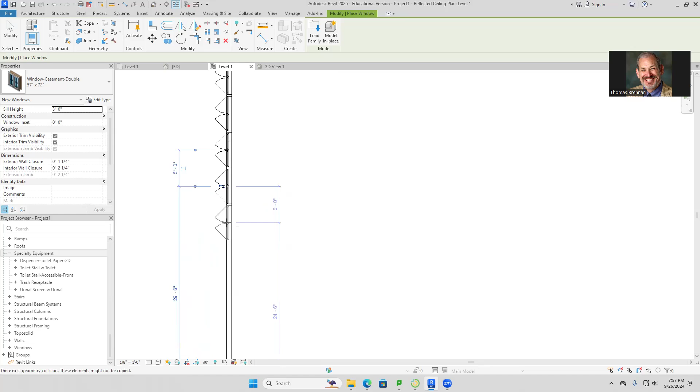It's fun, the flip things, space bar, like doors, space bar.

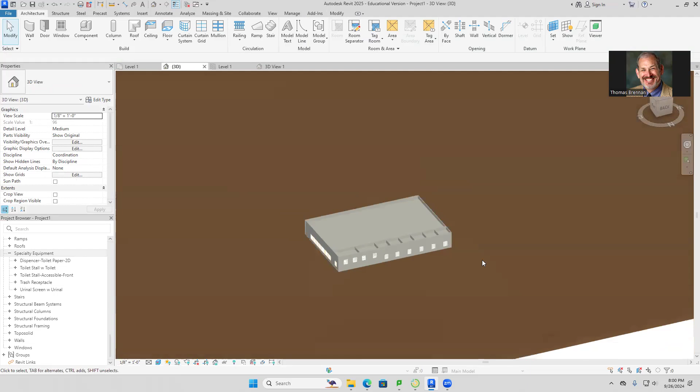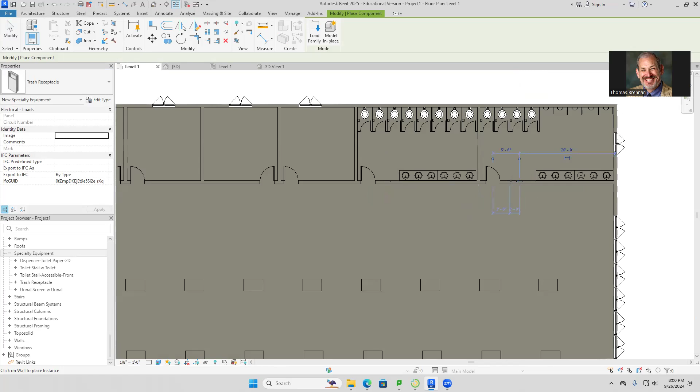Last one on significant figures, that one screwed me up. Was that a decimal or what? I think it was 0.00025 or whatever it was. Four, right? Sure, maybe, I don't know.

Who put 85? Yeah, 85 and up. I'm looking to bring home any trophies.

Do you have questions, Spana? Okay, so game of who wore it better.

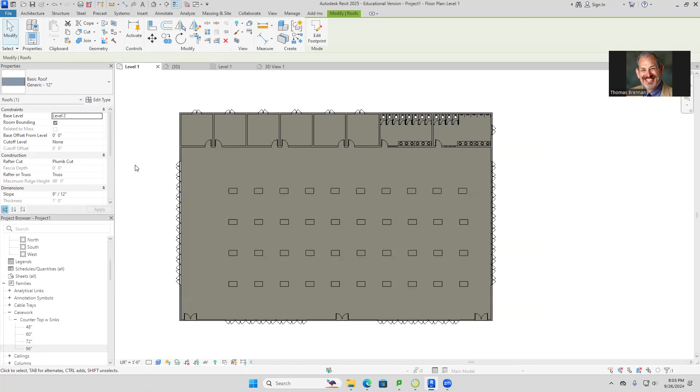Got a conference room? No, where are they gonna have meetings? The offices, yeah, I'll put one there. No, imagine, just leave it, just paint the walls white, white ceiling, imagine just like this, just looking at each other's offices.

Build the roof into a pyramid. These people think they're in like Tennessee or something. We have Bass Pro. How do you figure out how to add these light fixtures?

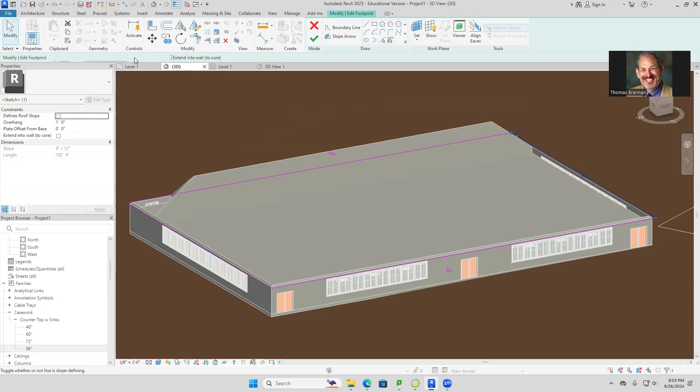Light fixtures are not there, so don't worry about those. They're not in the project and I won't have enough time to go grab them, so we're not gonna worry about those. Okay, nothing is. Same thing with the coffee grinding machinery, they're not there either. I'm not sure what happened, but they're not there right now.

So did you just put lab tables in the middle? I just use lab tables all the way. So what I did here is all these are just lab tables right there. Okay, so just to show you, this is just a kind of representation, I just wanted you to get the feel for how to do this. And there's a lot of other stuff I could have gotten in here, but it didn't really work out so well, but that's okay.

So just to show what this looks like, this is what the space looks like, like that. Okay, so we got that. And I might need to clean it up a little bit, but that's pretty much what it is, and that's the space. Even though it doesn't have the coffee roasting and grinding machine, just put tables there, so just in case.

Say it again? Even though it doesn't have like the coffee grinding stuff, just put tables instead, or no? Just tables are good. And these are all, I just use these right here. And I made arrays out of these, but I think those, yeah, so just use the tables. And that's all I'm gonna look for right now.

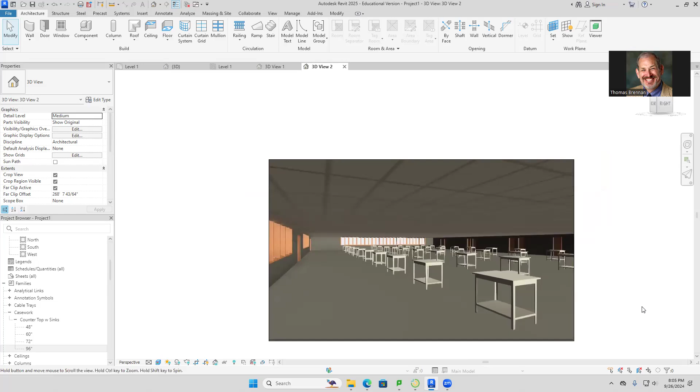And yeah, so when you're done with this, when you have all the elements, just go ahead and save it and submit it. And that is all it's gonna be for tonight.

And so the roof, what I use right here is a 9-12 roof pitch, which is kind of reasonable. And I gotta move these windows down right here. Yeah, can you help me?

Sure, one second. Yeah.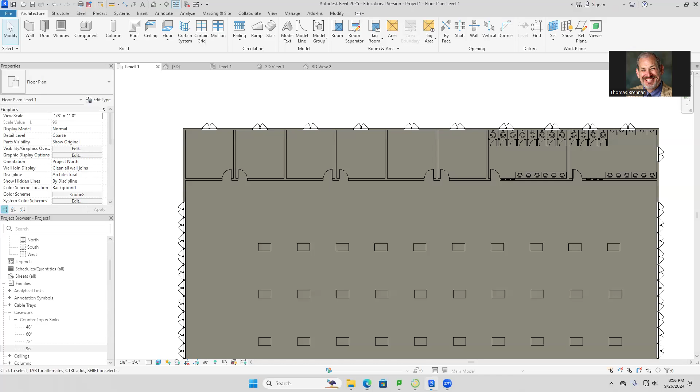Alright, save it. Mine is a lot different than yours, use the template, hopefully it's something that's highlighted. I understand what I'm doing a little bit now. Sounds like you're getting there. I'm trying to figure out how to...

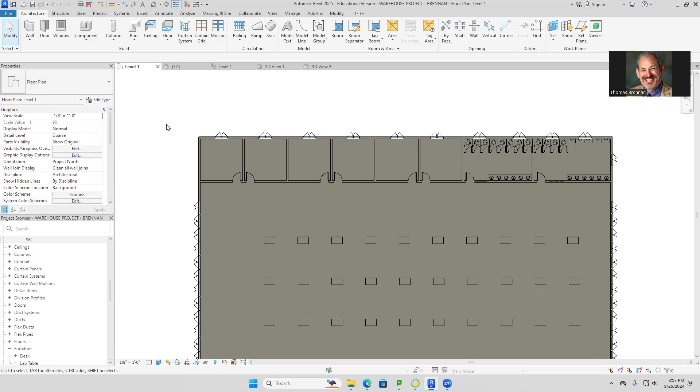I can dig them out and send them to you, worst case, but better to have your own copy, if it's ever on record. Always a good idea. So it should just be Warehouse Project, my last name? Mhm, that's it.

So should I tell him to send it right now? Yeah, submit it when you're ready. And we'll go ahead and submit those for the night, and that'll be it.